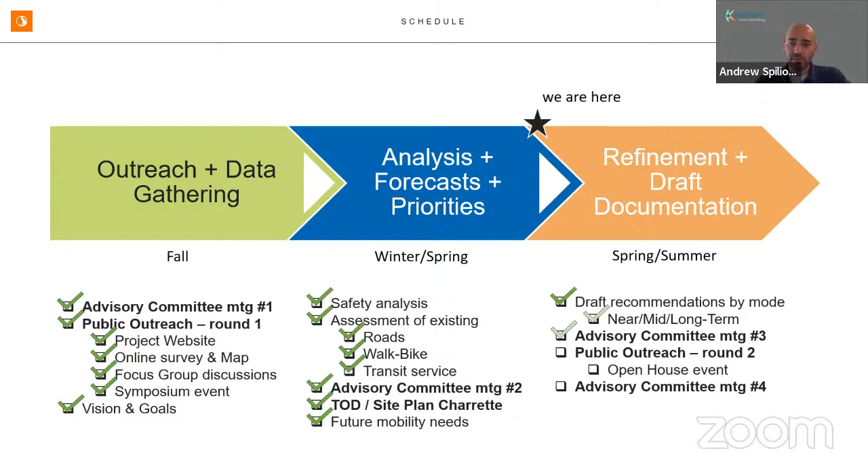And then now we're at the point where we are working on draft recommendations. The next steps are to receive your input tonight, to come to the council in July and receive input. And then later in the summer, we'll have a public outreach open house workshop and a 30-day comment period that builds off of that. And then that'll likely be putting us, for late summer, early fall, in front of the council for adoption consideration.

So the next slide goes into the agenda. We're looking to approve the minutes for both advisory committee meetings as the first item on the agenda. Then we'll provide a summary of the outreach and activities we've been up to since we met in February. The majority of the meeting will focus on the draft recommendations and receiving your input and feedback. And if we have time, we'll start talking about how we'll prioritize projects in the CTP. If not, we'll follow up on that. And then we'll wrap up talking about next steps.

So with that said, I'll hand it over to Stantec and open it up for if anybody has any revisions for either set of minutes or would like to make a motion for either.

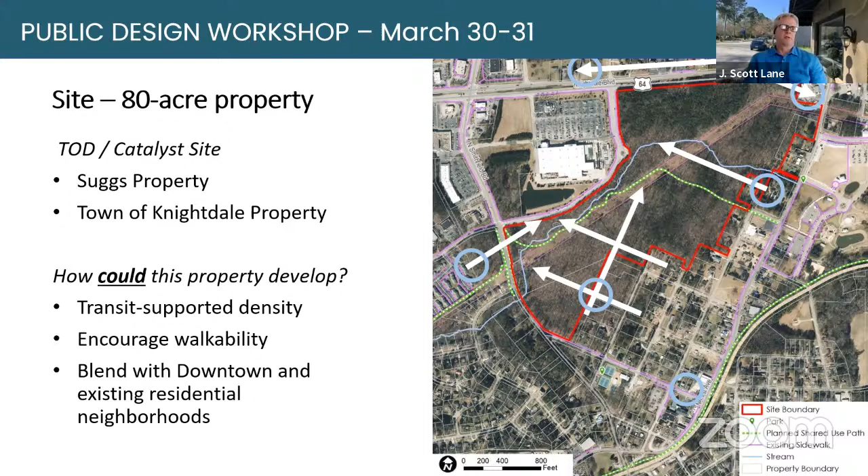So, next slide. Even as the design team and consultants were setting up, we were working with people that were dropping into the meeting space in town hall, and asked people to do a visual preference survey with dots, thinking about mobility options, living options, shopping, office, kinds of developments they really wanted to see in the area. That really fed into the design process.

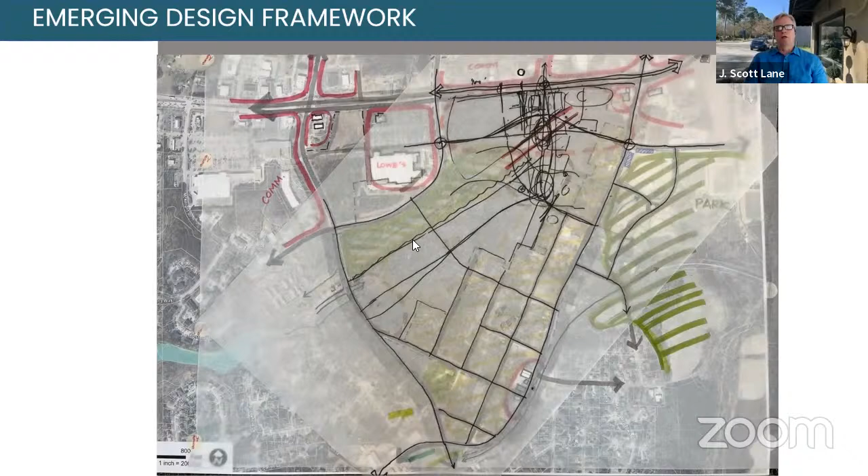A lot of existing residential single-family homes in the south corner of that triangle. Obviously the Lowe's and Lowe's shopping center is already there. We do have a big high-tension power line running right through the middle, as well as some preserved area for Mingo Creek and Mingo Creek Greenway at one point. So this helped the designers get our initial understanding of the flows and kinds of traffic moving in and out of the site, which led to this.

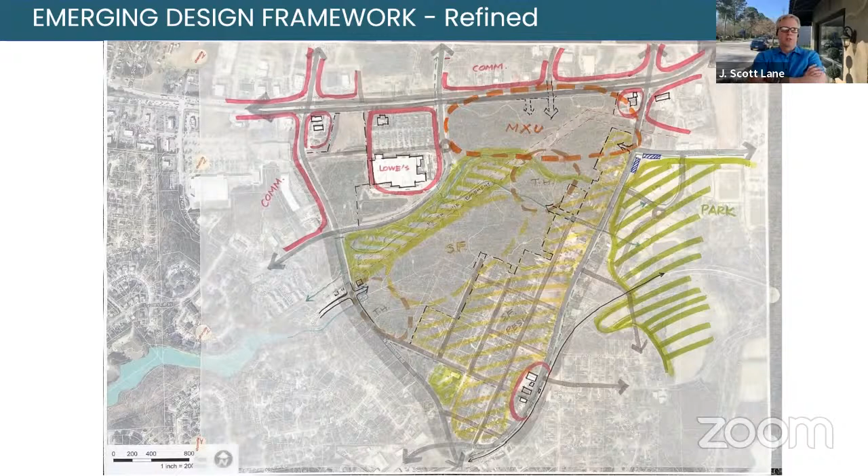And you can see a little bit more solidified types of land uses, thinking about more specifics about what could go where. Again, some of the similar constraints with retail up at the top near the high volume roadway at Knightdale Boulevard, the hard corner there at McKnight as well. And then thinking about what would go well in terms of residential down through the heart of that tract.

A little bit cleaner still, so this is a more refined version. And what we see here, just to give you a clue, on the top near McKnight and Knightdale Boulevard, that corner is retail, more mixed use and retail over to the right. And then as you move down the site a little bit, you get into the green space from Mingo Creek, apartment condo types of multifamily developments, the Center Greenway, and then ending up back again at the southwest corner with townhomes and maybe even some live-work types of arrangements.

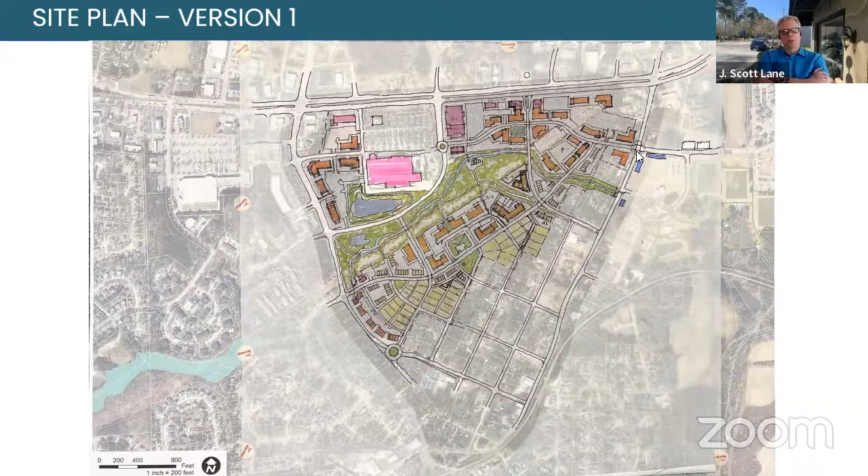And you begin to see also in this graphic where we've got some roundabouts, thinking about ease of access, ingress and egress into and out of the site for all the people going through it and into it. So those things are really important as the project and study continued over two days.

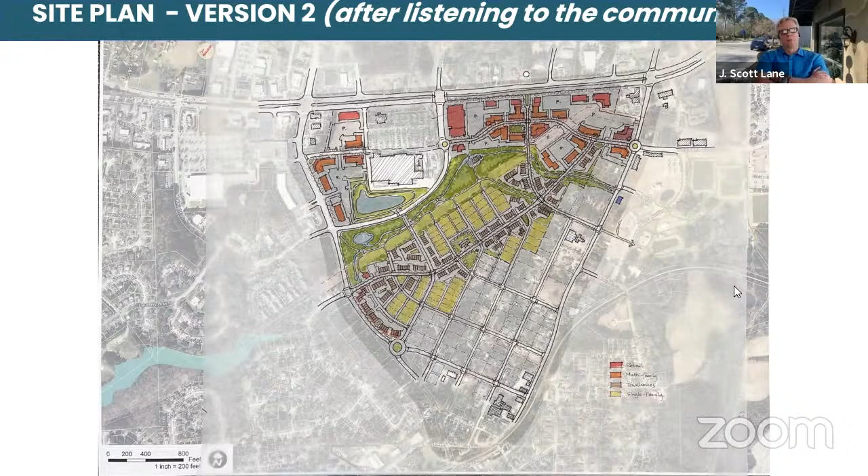This is great. So I'll stop there and let Timothy take it back over to go through some of the modal options to serve stuff like this.

Appreciate it, Scott. It's a good way to show the progression from beginning to middle to end. We certainly didn't walk in with preconceived notions—we listened, we used the visual preference survey, and made several iterations along the way, ultimately getting more refined with what we heard. Hopefully a lot of you have seen some of these pieces before; we just wanted to update the advisory committee on those.

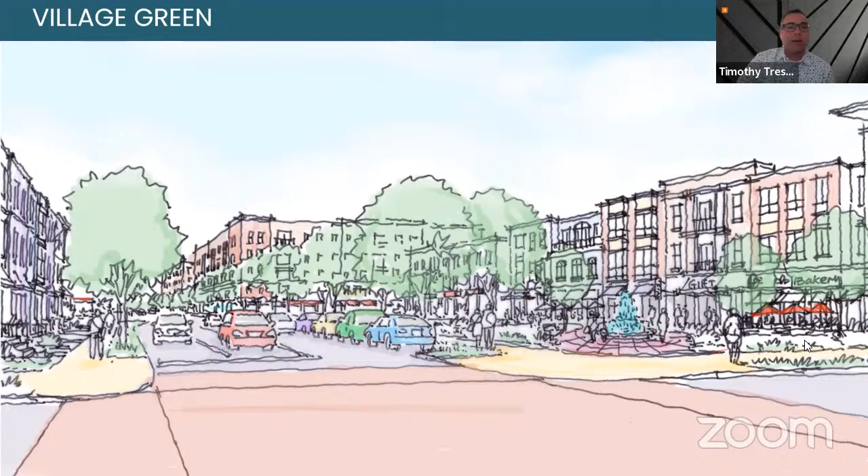A lot more of these resources are available at shiftknightdale.com. We put all the final presentation slides, up to 40 additional slides that went along with this, plus photographs. So more products are available to peruse as well. Great process—any questions on that before we get into specifics of here and there?

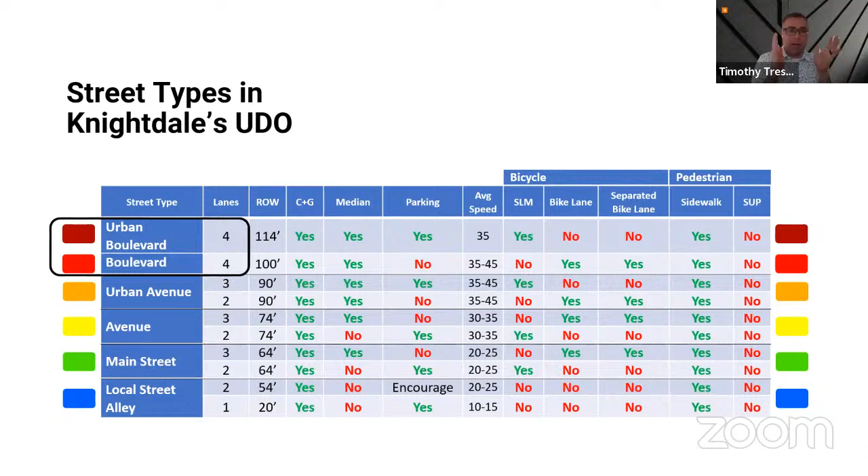And then whether there's things like curb and gutter, medians, parking, the typical posted speeds along those roads, and whether there's bicycle accommodations. Let's not get bogged down in the details here. I would just summarize to say shared lane markings are usually for roads that are slow enough or have a low enough volume where you can ride with vehicles. Or if you have higher speeds, higher volume, you shoot for bike lanes. Where you see no bike lanes, it's usually because there is parking. So those are kind of going in pair - it's one or the other for most of these roadway types.

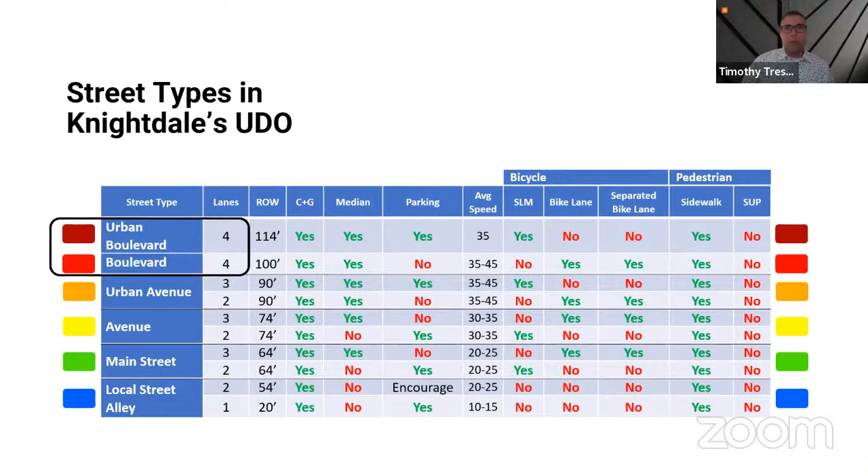And then from there, there's a lot of sidewalks. So if this is the high level big picture of your UDO from maroon to red to orange to yellow to green to blue, let's see what that looks like as cross sections. If we revisit them, the widest cross sections here, your urban boulevards with the most amount of volume, the 4 lanes plus a median, kind of look like these.

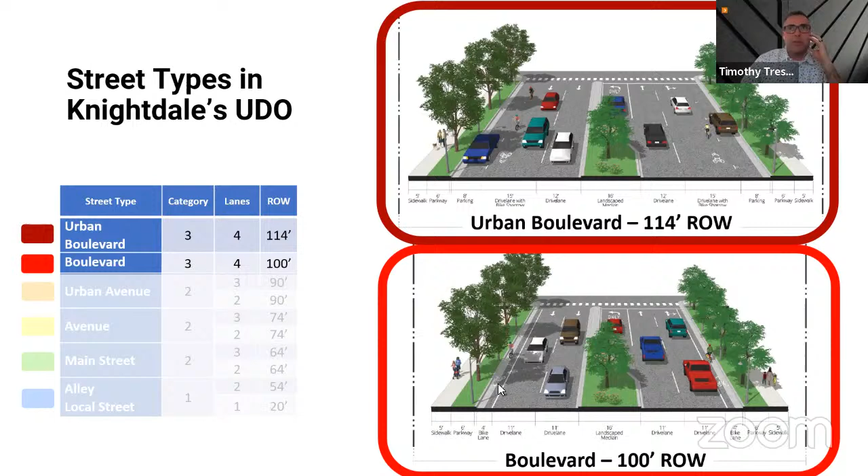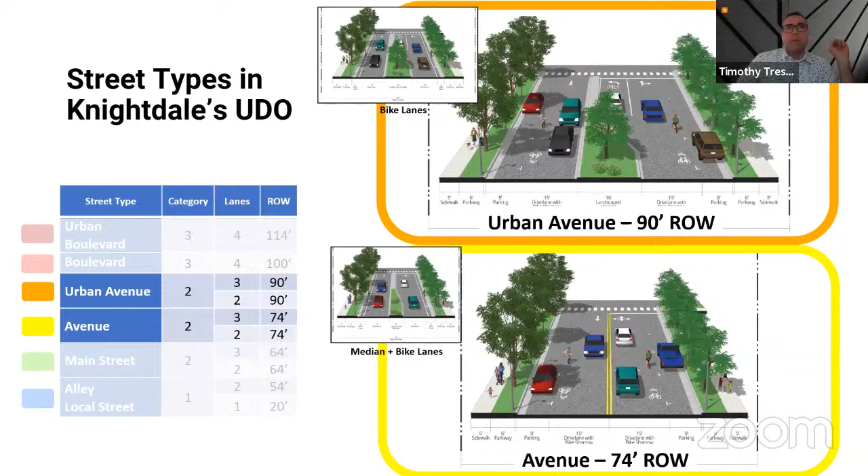The non-urban boulevards just on the fringe, a little bit tighter - I guess there's no on-street parking in that example there too. And then as we scale a little smaller, your urban avenues and avenues, whether or not there's a median. Here's the example of bicycle lanes in the top example, or on-street parking in the larger example. So just the trade-off between the bike lane option or the parking option - that's where those flip-flop back and forth. And then from avenues down to your main street and local streets, just scaling down from big to small.

So that was great, and that was really fun. But Timothy, this is really hard to see on a PowerPoint slide. So though we're going to walk through this in Mural, let's look at this one more time and stagger it from big to small.

Let's start with those big roads, obviously the interstates, and then the major roads supporting them, the 6 lanes and above. Again, this is the same roadway network, we've just blurred out or grayed out the lower level roads, beginning with I-87, a major thoroughfare through 540 and its completion extension to the south. It will add another 6 lanes. Then portions of Knightdale Boulevard and Smithfield Road are 6 lanes in the future of our CTP network.

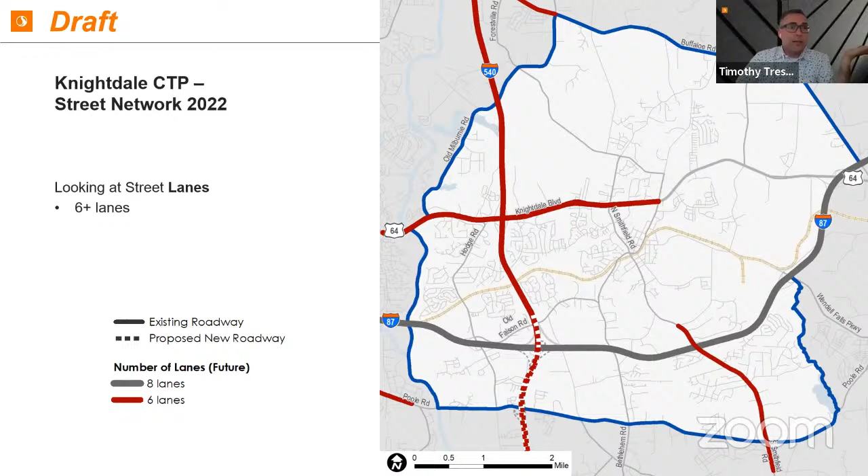So with that, we would then layer in the next level down, the 4 lanes. This is where we're complementing those major thoroughfares with some pretty significant urban boulevards or traditional boulevards. Again, existing roadways that are out there right now are the solid colors. You see Buffalo Road is a significant corridor, Marks Creek north-south in the Milburnie segment, kind of over here on the east side. And then, of course, Poole Road across the southern extent, a major east-west roadway that we're sort of thinking is a boulevard, 4 lanes in the future, and it's concurrent with the 2050 MTP recommendations right now.

I will point out that between the existing roads and the proposed new roads, what we've formed is this kind of outer periphery road of 4 lanes where we're trying to keep vehicles out of the core of Knightdale and encouraging them to use the outer periphery roads instead, the lone exception being this extension of Old Faison into Knightdale Boulevard, which in theory will be pulling vehicles off of Smithfield Road.

So if we went from the 6 lanes and above now down to the 4 lanes, this was our roadway network. If we then layer in the 2 and 3 lanes, it makes a lot of local connections. And I understand and acknowledge there's a lot of lines there, it looks like a lot of spaghetti. But what we're doing is we're adding 2 lanes, or in some cases 3-lane connectors, so that you don't have to use the major roads.

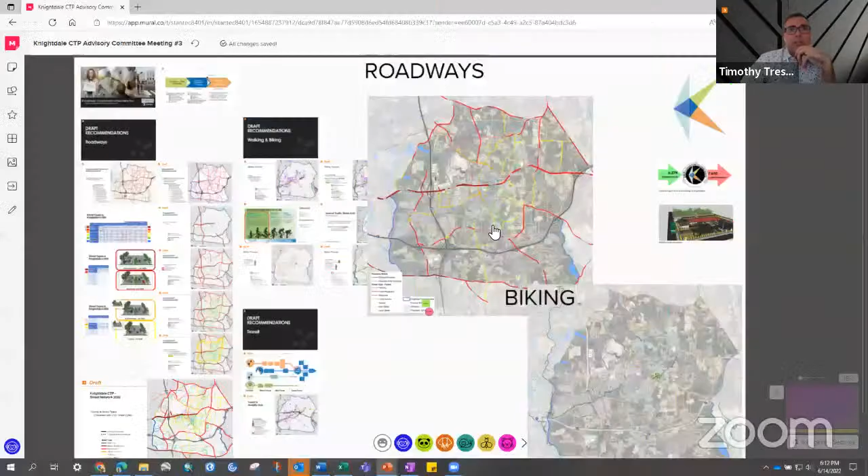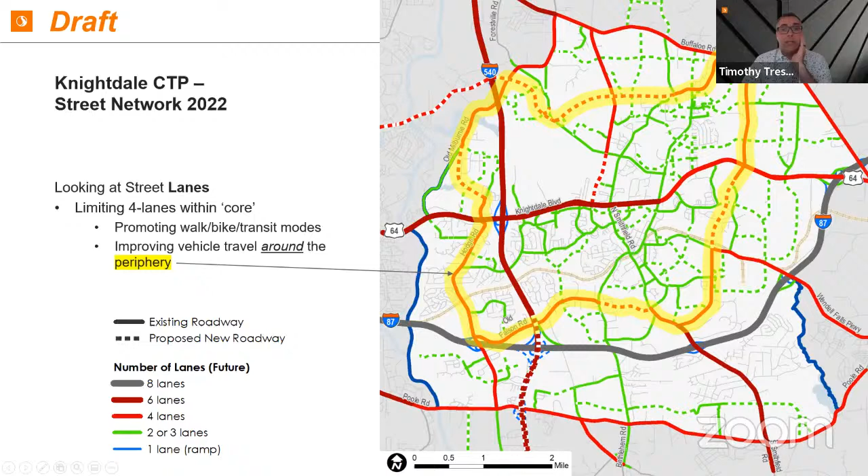And of course, utilizing your core for more walkable, bikeable, and transit-friendly opportunities for development and for mobility. So on a big picture level, we've kind of gone high to medium to low. I'd love to pause here, acknowledging that we can happily jump over and see these in more detail in the Mural with specifics. But as far as the concept goes, I'd love to hear some feedback on what you've seen thus far. We really want to hear from this committee and kind of feel your feedback.

This is McDonald. I'll just go ahead and jump in. I'm seeing a lot more roads with a lot of lanes, a lot of right of way than we're really looking for. I think we're trying to really dive into actually de-emphasizing the car, emphasizing efficiency of movement over just the volume of cars going through. And so specifically, I'm concerned about Hodge Road north of 87.

Much of that's already a built environment. And I just in general, I think I'd like to see a lot more urban Ave or avenue throughout. And then, I know currently Smithfield Road handles a lot of volume, but I kind of question if 6 lanes is really going to be necessary with the completion of 540 eventually coming through. Those are kind of my high level thoughts. A lot less red, a lot more orange. That's what I'm looking for.

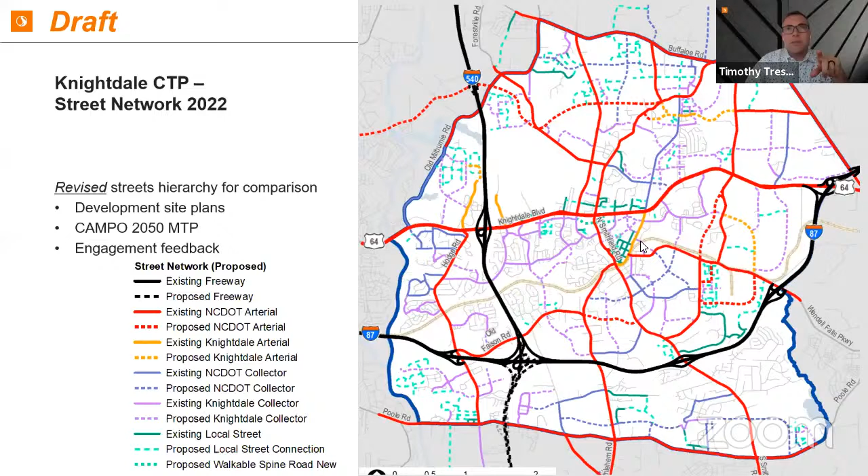Yes, it was in the MTP. Yep, there it is. And that may have been what we thought - we don't know if we could do it, but we'll put it on the map in case we can.

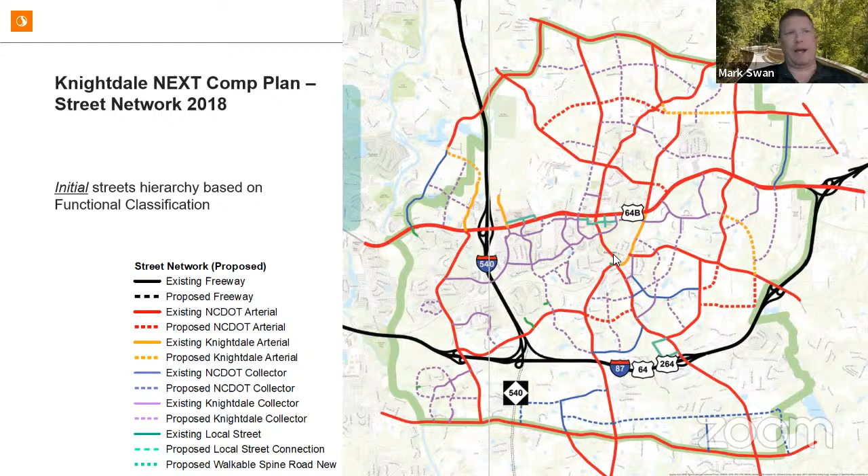Because obviously that's a narrow spot, it's hard to build through. Also for context, where I think I can add value to what the engineers are saying is Smithfield Road - just north of First Avenue, it's quite narrow through there. I don't know how you fit 6 lanes without demolishing houses. So just FYI, that is a particularly tight spot.

Absolutely, it is. And thanks for bringing up the northern connector piece here too. This is also kind of a long range connection point across the north that we inherited. We changed the geometry and alignment here, made sure it didn't conflict with some of the development plans around it. And we're seeing this connection with Forestville Road a little differently than previously.

With the Skycrest Drive extension, with the new exit off of 540, Skycrest Drive is going to be the much more heavily traveled route. And Forestville Road right now, which doesn't have an exit, is the more heavily favored route. So I think there's a lot of adjustments to be had between crossing Beaver Dam Creek and making sure these 2 roads come together before the creek.

There's one bridge over the creek. And from there, there's a very easy option to head east versus south. So the dominant movement here is an east-west one, and it's going to take a couple of intersection improvements in this area to make it just right over time.

The other piece I'd add is this is not happening tomorrow, not happening by 2025 - these are 2050 kind of visions. Our idea here as transportation planners and designers is hopefully to make sure these 4-lane roadways aren't needed by then. So we're reserving the capacity for them in our long range plan, but we're actively working towards other modes of transportation so we don't have to build them.

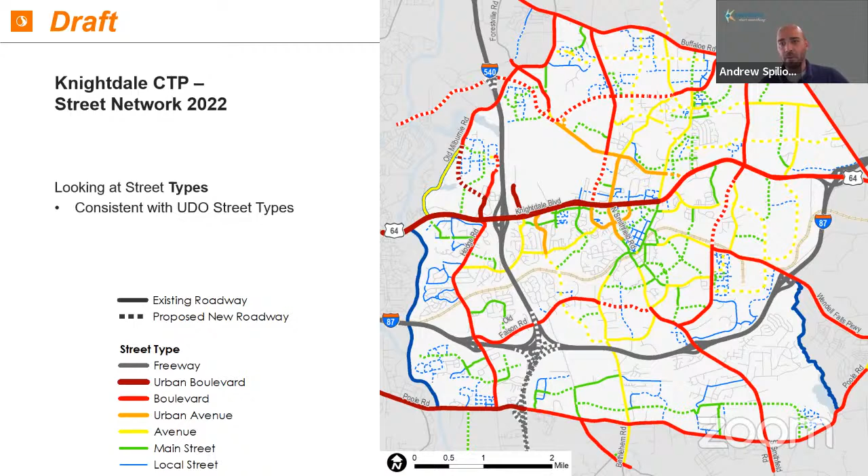We've requested additional data and started looking at projected volume to capacity ratios and stuff like that. What we're finding is you could really go either way on whether 4 lanes are needed on some of these roads, or if 2 lanes are adequate. If you go 2 lanes, you may have some peak hour congestion, but the rest of the time you're not overbuilding, and that congestion could be encouraging people to use other modes of transportation. So we wanted to present the recommendations as received to get your feedback.

We certainly see the concerns around roads like Hodge, and we also understand where Milburnie Road turns into Marks Creek Road, some of those connections may not be feasible based off some development plans under review. So it may just end up needing to be 2 lanes in some of those segments.

One thing we did want to touch on is, are there any roadways shown for 4 lanes that you all think maybe should be 4 lanes? One thing I personally wrestle with is, if Hodge Road is out, do you try to make Milburnie, Marks Creek 4 lanes? So you have one corridor that's 4 lanes going north-south. That's kind of where we're at internally as staff, if that helps give a little additional clarity.

I'll just say I really appreciate the way you thoughtfully worked through that. The idea that maybe it makes sense to not have 4 lanes until south of the school. And so then you might have, because I don't control how much development there is south of Hodge Road, my fear is seeing how it backs up now, that could become a bottleneck. But if it were 4 lanes with that bridge south of 87, then maybe that helps.

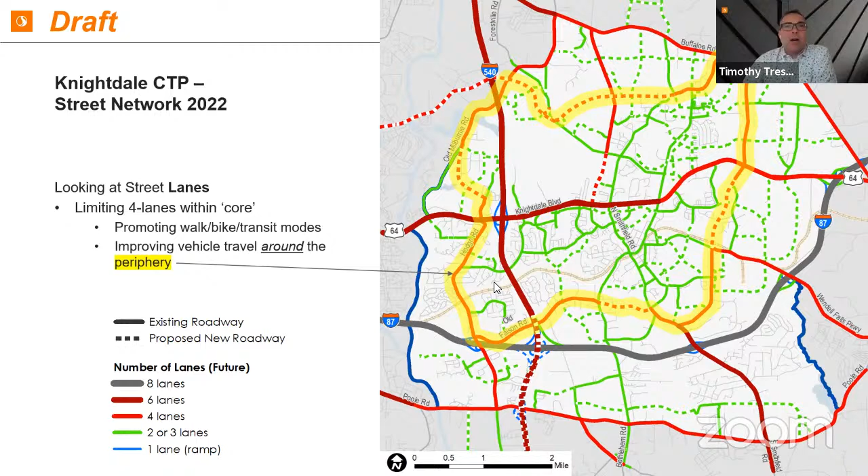Great points, all really great points. Hopefully I captured all of them. Okay, so in the interest of time, let's table that and we can revisit that through the mural.

I wanted to note there's some additional hotspot and concept designs we're looking at in more detail. A lot of the signalized crossings near transit stops along Knightdale Boulevard is one where we're taking a more engineering level approach. The Widewater bridge over the railroad tracks is something we're looking at and examining, as well as the intersection of Bethlehem Road and Old Faison and how that aligns.

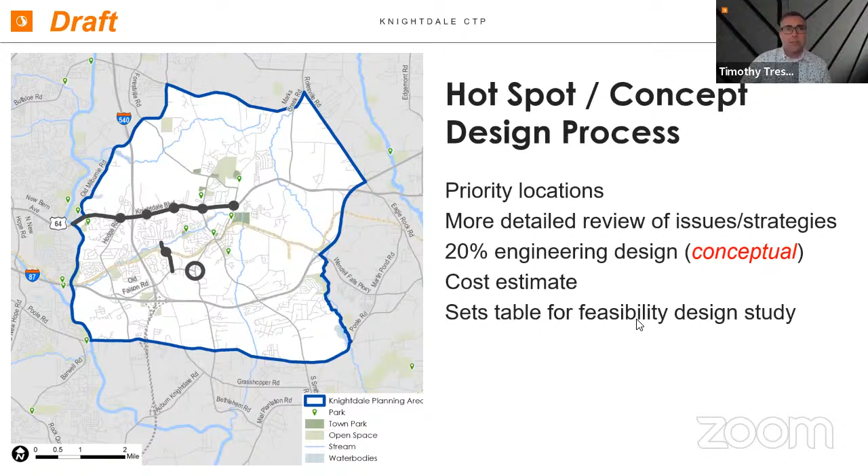So we're having our conceptual designers look at more detail on those 20% engineering plans, getting some better cost estimates, which would really help you set the table for some more feasibility studies. More to come on those later.

So let's jump into the walking and biking, because it's a complement to it. It's hard to start with this, which is why we started with roadway. But we're going to similarly build from existing sidewalks, shown in purple, and greenways / shared use paths, whether located along a stream corridor or roadway side. Here's your network as it exists today.

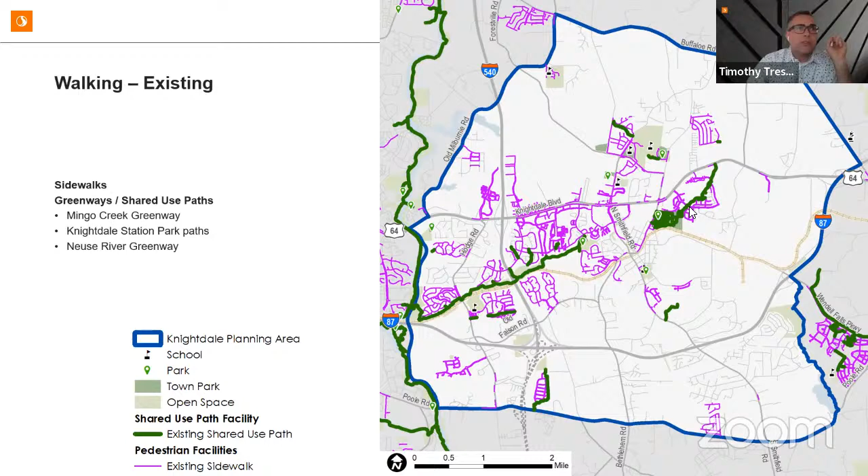We spent a lot of time updating this using 2021 aerials. You can notably see the Mingo Creek Greenway, the Knightdale Station Park trails, and how it connects with the Neuse River Greenway as well. So the proposed network is looking to add more than 24 miles of sidewalks.

This is in the hardest to see, lightest purple color, shown in dashes. There's a lot of extensions along Knightdale Boulevard, but also stemming out of Old Town. So anything that connects roadways in the core a little bit outward, we've mostly got sidewalk extensions there.

Then your greenways or side paths, essentially the same thing—it's just where it occurs, whether it follows a greenway, the roadway, or whether it's more of a recreation trail versus transportation side of the road. That's your light green and your orange. A lot of the larger roads would have a side path because there's too high a volume or too high a speed for bikers to be on roads, so it's really a side path, multi-use path on the side.

And then greenways in lighter color—if there's a lot of curve to it, it's because it follows a stream alignment, and a lot of these we inherited from the Wake County Greenways plan. So some of these connectors would follow Beaver Dam Creek across and over, and then adding in on the east side of the Neuse River, a greenway trail that follows both sides.

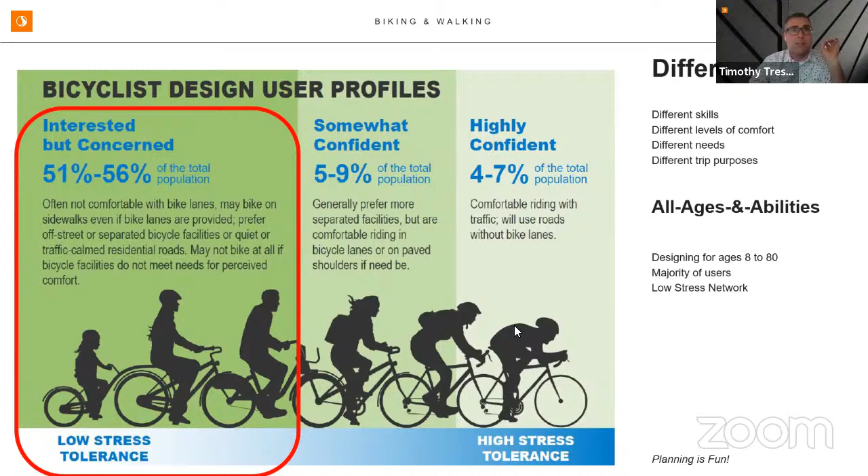This approach helps us design for the greatest number of users, emphasizing those low stress networks. So we're gearing towards these cyclists and trying not to accommodate only the advanced cyclists, which represents actually a very small proportion. So you may have seen previously, we did this level of traffic stress analysis, basically how easy it is to bike along certain roads.

The reds and oranges are too fast, too high volume of vehicles to make it really safe and easy—those were for the moderate to caution to advanced cyclists only. But the blues are a lot of your neighborhood streets, and that's the low stress network we're trying to talk about.

So we've got some significant barriers to overcome, but there is the beginnings of a network on the local roads. We want to build upon that by having more of these separated bike lanes—bike lanes above the curb, adjacent to the sidewalks, not actually down between the curbs with the roadways.

So separate bike lanes in orange along these significant arterials, and buffered bike lanes - there's really only one good option for that, because on this portion of Old Milburnie we have wide enough shoulders where we could fit in the extra 3 feet of horizontal buffer.

Traditional bike lanes, if the volumes and speeds are low enough, we can utilize the sides of the roadways, say on Old Bethlehem Road. And then shared lane markings where speed and volume are so low that it's a neighborhood street - the vehicle and bicycle can be in the same lane at the same time because we're talking 25 miles per hour or less.

So this is our proposed framework for how to make sure we translate that all ages and abilities approach into our roadway projects, so they can get constructed with the bicycle improvement projects at the same time.

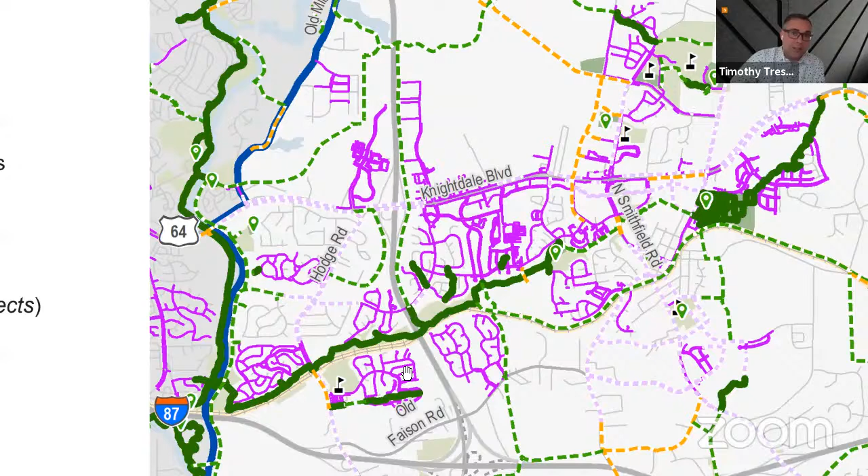So right now it's back over to Hodge. It's a side path to get you up Hodge onto the Greenway and then back, because unfortunately we're just not going to get an at-grade crossing of the railroad corridor. We're not exactly handing those out these days. I wish they were. And then 540 is another challenge - can't exactly go over or under 540 these days. So open to some creative solutions, but right now it's about routing to your nearest corridor north-south.

We've limited the number of crossings of the interstates and railroad, given feasibility and cost. But if there's places y'all think there's no harm in showing it on the map - we just know it's going to be a lot of uphill battles to get those implemented. And by the way, I'll go ahead and say something, since everyone would expect me to on the greenways, but I'm fairly happy with it and like the additions.

Is it possible to go for a grade separated road and road crossing on Hodge over the railroad track? It's at the bottom of a hill, I don't know if that's doable or not. I'm really not sure, but by taking out that intersection, I guess they're still not going to give us another one back though - they're just going to take the win. I will say, like where I live in Raleigh, they're doing that over the House Creek Trail and Blue Ridge Road, and they got MPO funding for it. So I think it's definitely possible to do at some point in the future.

McDonald - I'm sorry, go ahead, Swan. No, I was just going to say maybe it's good to have that on the radar as far as Hodge Road. Yeah, the only other thing I was going to comment on is down on the new section of 540, that we're all waiting on between Poole and 87. Is there potential there where we could look at having an east-west connector, and they might reserve us a pedestrian tunnel underneath 540 or something like that as they get ready to build?

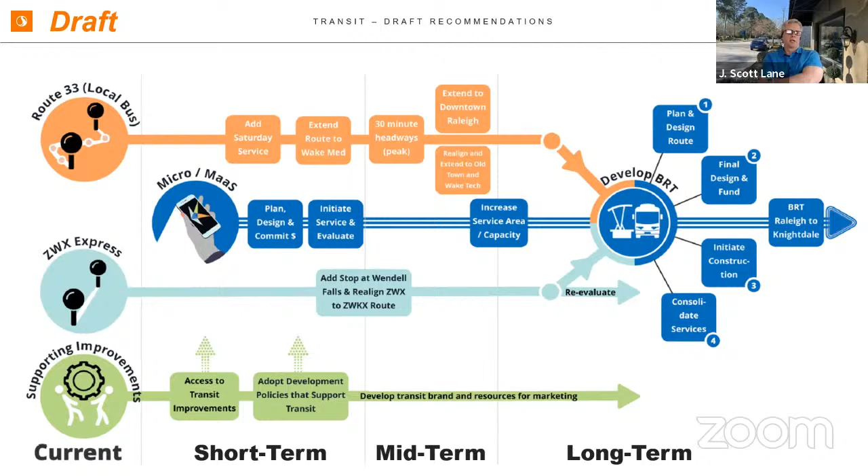Sorry, Andrew—oh no, good. The most likely route adjustment would be after the Suggs tract, if and when it is developed. We would have those conversations with Go Raleigh about potential rerouting, and with the council and staff too, on balancing the competing priorities of continuing to route through Old Town versus a detour through the Suggs tract.

I'll just add on to Andrew's points, which are all really good—part of this study and planning exercise is funded by the Wake Transit Tax Community Funding Area Program. Each community gets the ability to compete for funds annually in that. Once you've completed a planning task, you're able to go to that same pot of funds for both capital and operating—to build sidewalks, to build mobility hubs, to build capital improvements, you can do it through that funding source. And then if there's some identified micro transit service, whether it's extension of the Northeast Wake County micro transit or some other micro transit, whether bike share or scooter share or something like that, we can actually get operating funds at a 50% split with the Wake Transit Tax District too. So that's kind of how we'll start to fund some of these changes and make it really occur.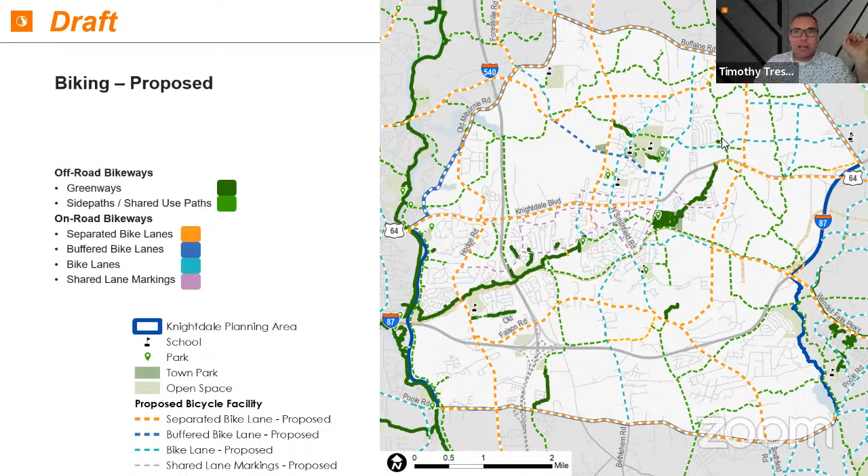Thank you for referencing the greenways. I realize now it was a mistake to leave off all of these lines, but just imagine these green lines in the background underneath everything. That's why some of these mobility hubs were selected—because they have great future greenway connection opportunities.

So just real quick, Jason and Andrew, when we're reviewing development, I think we're going to reference this map to help us make land use decisions around proximity to these hubs, I would imagine. Yes, my goal is to have a map similar to what y'all have got in the UDO appendices, a separate one similar to the greenways but for mobility hubs. That way we can partner with the development community to implement some of these parts of the hubs.

Great points. This is McDonald. I wanted to ask about the neighborhood scale mobility hubs. There's not any on the western side of 540, and I wonder if we're missing something on that edge of town. I know we've looked at points of connection, but what does a neighborhood scale mobility hub look like? Where would that fit in on the Hodge Road corridor?

Yeah, that's a great point. I think we had that on the original map, we missed it on this version. We looked at that as kind of like an enhanced bus stop, and there were three potential locations in our mind: it could be at Old Milburnie, where we've got a recommendation for future bus stops once it's signalized; it could be at Westover, say Knightdale Gateway happens at signalized crosswalks—that's a good middle location where a future BRT stop might logically be; or it could be at Hodge Road, or some combination of them.

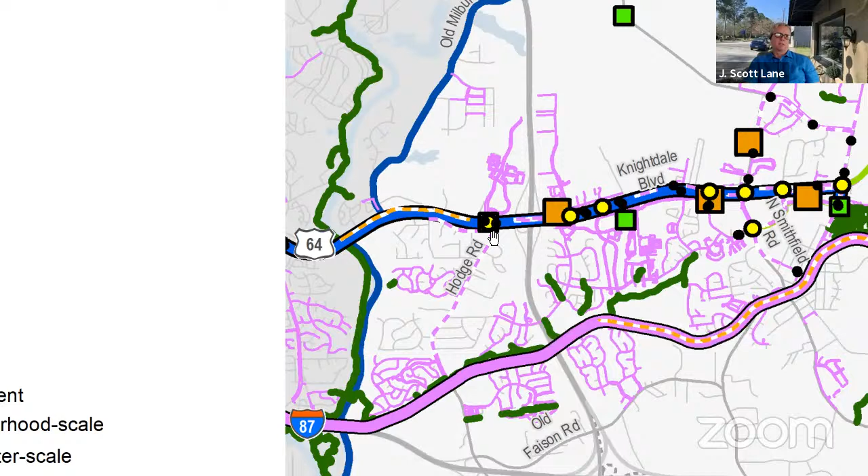I think if you get to the other side of 540, you might have more commuter oriented stuff like electric vehicle charging, van pool, and potentially, depending on what GoTriangle does with their future service, some type of micro transit there as well. And Ben, I do think there actually is a neighborhood scale mobility hub at the Hodge Road intersection—it's just covered up by yellow and black dots. Yes, sir, I think. And think of them as modular anyway—they'll get bigger as they get used, starting basic and getting better and better over time.

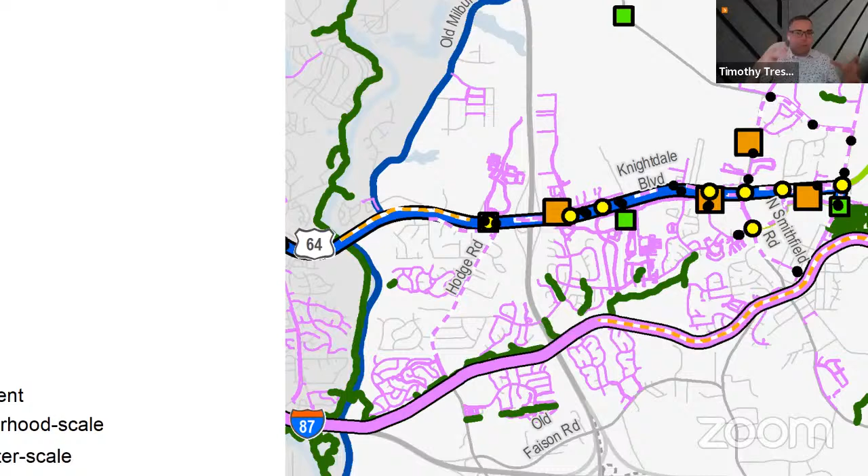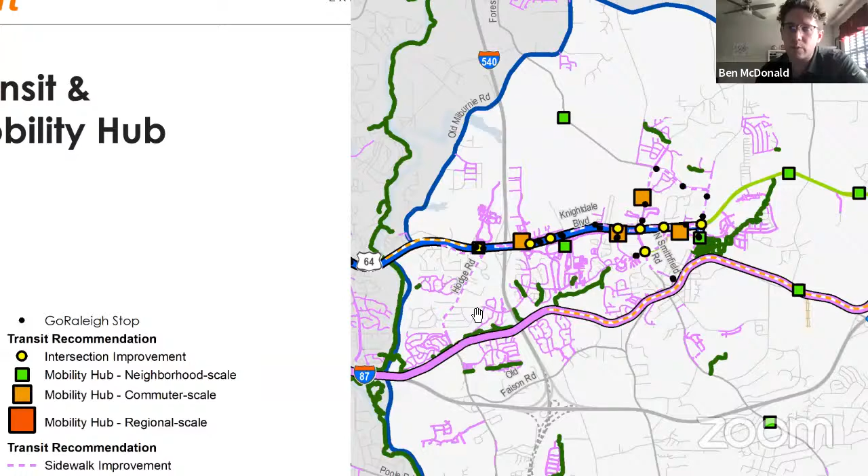I'd say Poole and Hodge might also be another great spot for one—we've got some density approved there with multifamily, and we're anticipating retail. Glad I see the hidden dot under there, glad to hear that's there. It's the existing transit stops that are just kind of obscuring it. And Andrew's right, we were going to plan one right down here at Old Milburnie—I just must have missed digitizing that one.

That's great. I'd point out that transit ridership on Route 33 has really rebounded now after we've eked our way out of COVID, and has actually exceeded pre-COVID 2019 levels. So there is a desire for public transportation in Knightdale, and that's been proven through surveys, through the actual ridership, through the comments we got in this process. It is most definitely there—we just have to provide a common sense, complementary set of options that make it competitive and work.

Right now, it is easier to ride a bicycle when I'm sitting in downtown Raleigh to the Knightdale Library, and faster than it is to take a bus. And that's wrong.

Yeah, that's what we're trying to accomplish. But great comments. Even when it was express, it was close for that ride.

So you actually brought up a second question. First question, are these available in GIS layers that we could look at? They are now. Thank you.

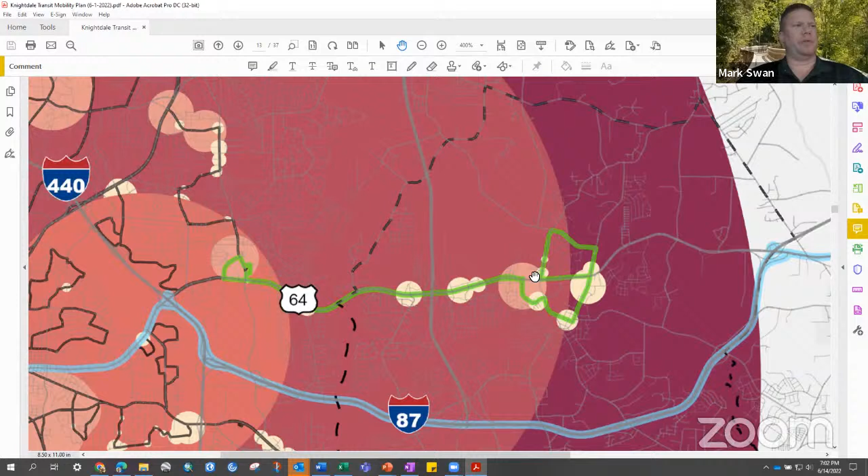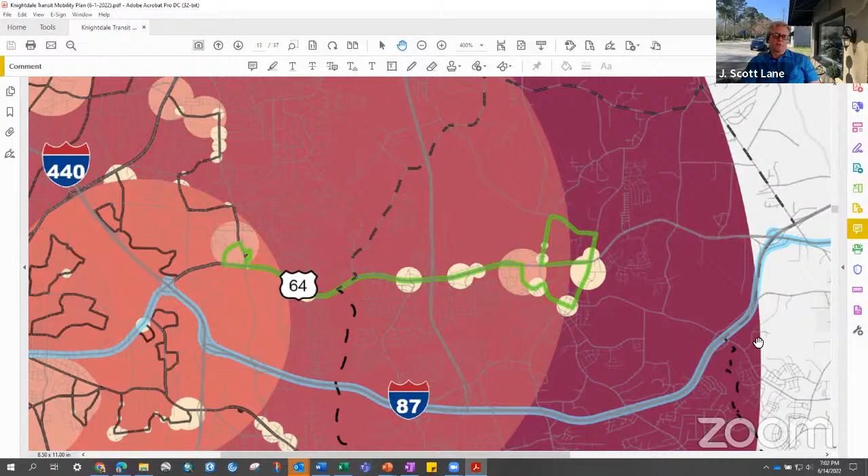And to give you the idea of scale, the big red thing around the edge, I know your color issue there, but thanks, Tim. That is Moore Square, in downtown Raleigh.

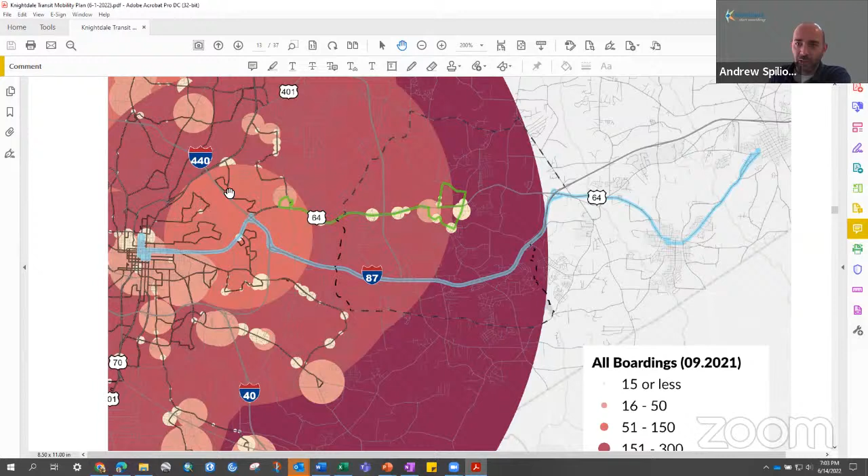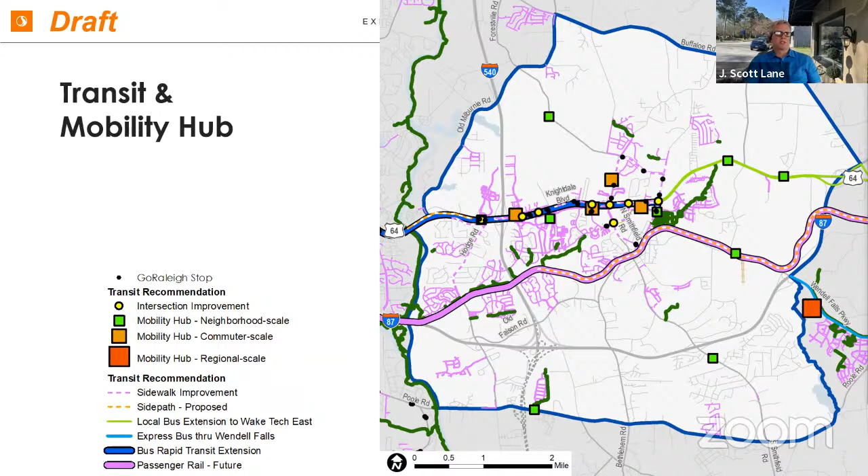So I hope we've adequately confused people with roadway recommendations and the lines everywhere. We've sort of made it more convoluted with the different types of biking and walking improvements and what we call certain things that look very similar. I like talking transit, it's a little bit more tidy and neatly packaged, but there we are.

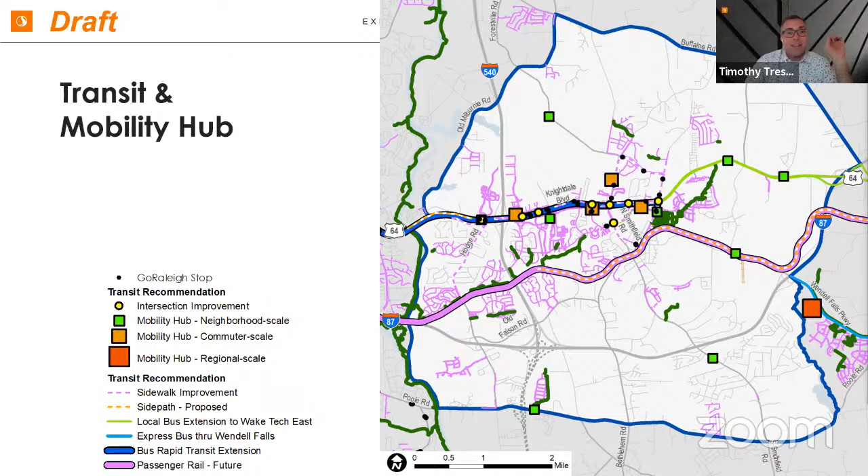We've got a framework for what to improve and where. But we hit on a really good topic about how we can encourage these things to happen sooner, and that leads us right into prioritization. It's a brief conversation at this point, but I want to make sure everyone's up to speed with where we're thinking about going with these things.

Beginning with a reminder from the survey, we had over 300 respondents, and we asked them how they would spend $100 on transportation funding given certain types. Basically, what's a percent out of 100?

And it's maybe 50-50. Improve roadways and what we care about for driving, improve multimodal and how we can improve those other modes as well. So I see this as a 50-50 split and a really good balance.

But what I really see is a lot of people have a lot of opinions, right? You're never going to get an 80-20 when it comes to this question, ever. So I'm encouraged by what I see, and it just kind of reinforces that we are looking for the multimodal solutions here, right? A good balance of how people perceive improvements.

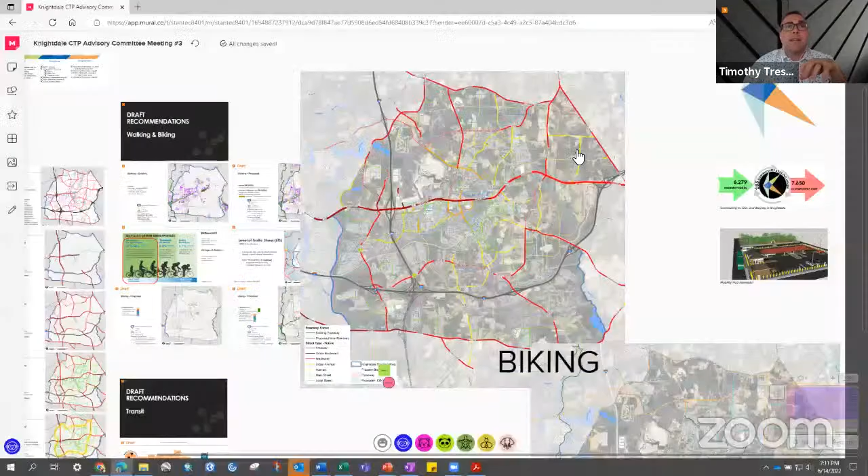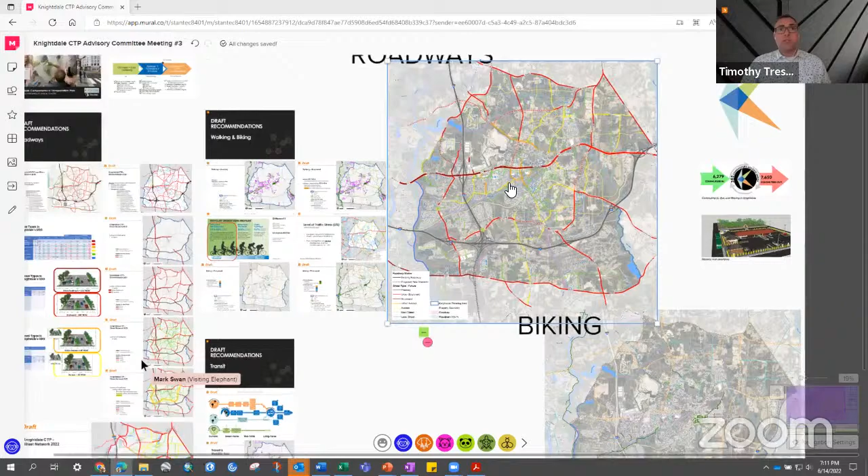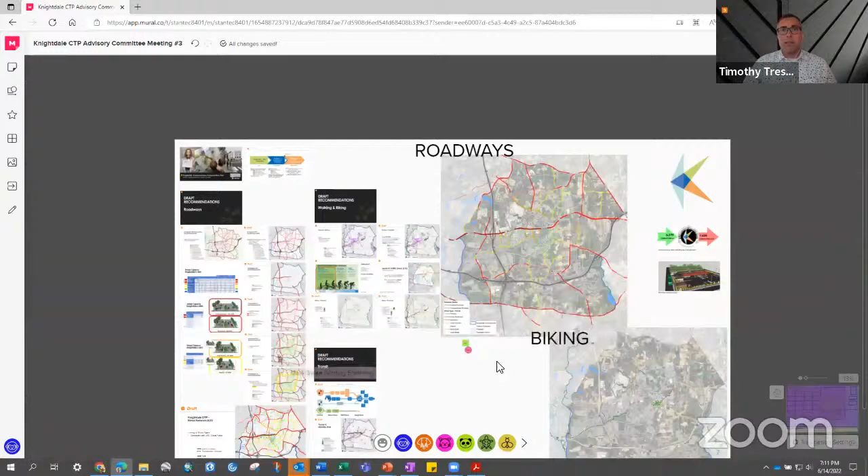Before we jump to next steps, I want to reiterate here is the link. I'm going to share it one more time in the chat box, to make sure everyone has it, because we want you guys reviewing these in greater detail and seeing some of those pieces. I see some comments already, which is great, that's kind of what we want to see. So please continue doing that for the next couple of days. We will be sure to read all of those.

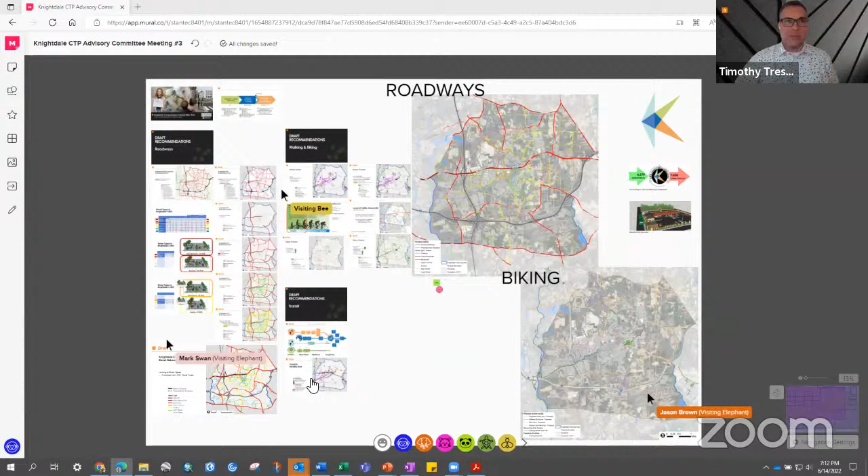Where is my chat box? Can somebody find their chat box and possibly put in this link for me? I don't have one, and that occasionally happens to me on this platform. Yeah, mine sort of disappeared. Let's blame Dustin. You can blame me. I didn't see a chat box either. Okay, so we will obviously include this with the meeting slides as well. But look at this, we've got some wonderful people in there moving things around. So thank you for that.

We want to be reformatting and revising this feedback over the next week or two. We'll be looking for an open house in July to share more of these ideas with people in an actual in-person environment where they can view, tell us what we missed, and have some more voting exercises when it comes to what they value in the near and midterm. The target audience will be just about everybody, and we will use you guys to help us communicate and get the word out. So you're not off the hook just yet. Thank you for the work thus far. We're going to lean on you one more time to help spread the news when we get to the open house format.

We will be doing that in the July timeframe with a draft report getting formalized in pieces along the way. We are going to have a fourth advisory committee meeting where we'll look just at the draft report pieces and making final edits in that late summer or early fall timeline. So that's kind of the schedule looking forward and how we're shaping up for the remainder of our calendar.

Anything I've missed here, Andrew, along the way? We kind of went through the roadways, the bike ped, the transit, and a little bit on prioritization as well. And then we're going to leave everyone with the mural link to get more feedback.

Nothing you've missed. The only thing I might add is we may have some additional conversations around the number of lanes in the roadway plan. We're very receptive to the feedback received, but we may want to keep the conversation going over whether there are any roadways or segments where we may want that additional capacity, just to get some additional clarity from this group as we continue to move forward. Well said. And I'm all for making sure the locals have the town and the future needs that they want, so we are trying to navigate that balance. As multimodal planners and designers, we're on that side of the equation too. So we are hard working for all those lines and segments and dash lines to make total sense in the end and complement one another. We're looking for systems that function.